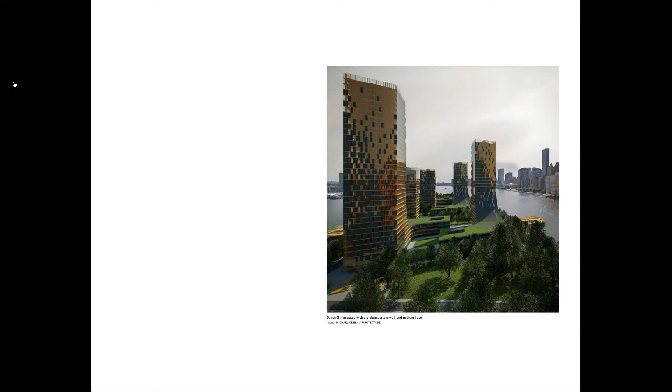So really what happened was, and here I am in the back of the room, talking to a gentleman that I happened to be sitting next to. We were talking about not work, and it turns out that he was a structural engineer. He was from Chicago. He had a child in college at MSOE. And so at the end of Michael Green's talk, I said to this gentleman, is this for real? And he said, it's absolutely for real.

And it turns out it's Bill Baker from Skidmore, Owings & Merrill, who is the engineer of the tallest building in the world. So he got up and presented that 2 hours later. So that really got my attention. And we had been sort of following it ever since. So that was my introduction to mass timber.

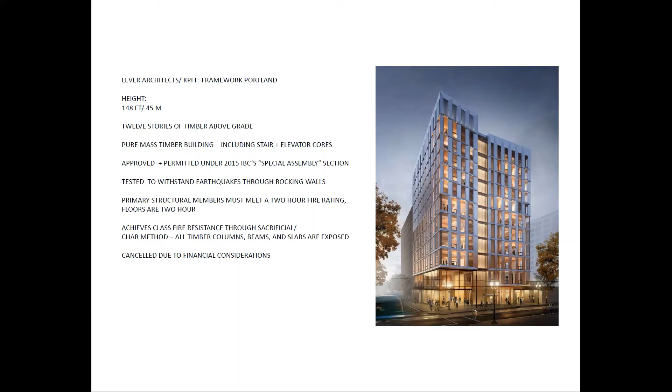So this is the tallest mass timber building that has been permitted in the United States. This is a 12-story high-rise in Portland, Oregon. It's called Framework. So they went through all the testing, which we'll touch on. They got a building permit, and then unfortunately, for financial reasons, the project was canceled. But you can see this was the tallest one in the United States, and its timber was exposed. So this project is critical because this represents how we got our path to approval, because they did it basically through a performance-based testing process, which we'll touch on.

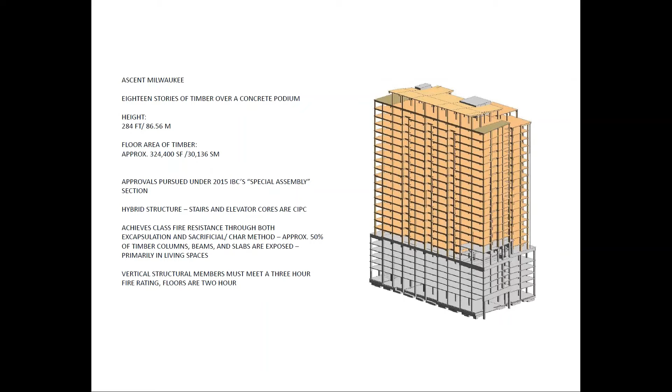So the cost issue is basically the fact that the timber that's exposed has to be really, truly oversized, because basically the timber fireproofs itself. So any of our timber columns or beams that are exposed are oversized by 4.5 inches in every direction. It's called the sacrificial layer. And that's been tested to prove that it can burn for 3 hours and still be structurally stable. And that's the requirement of buildings that are over 180 feet tall, which we are.

So this is just a quick overview of the systems, and it's also a pretty good indicator of how the building will be built. So we have a deep foundation system, we pour our concrete podium, and then we erect the timber on top of that. It's likely that those cores will be all the way up before the first timber arrives.

And so there is no prescriptive code under which this is allowable, but the code that Wisconsin lives under has a performance-based path to approval. Again, following what happened with Framework in Portland, there's alternative means language in the code that basically says if you prove that you can meet the criteria for a building of this height through independent third-party testing, then you can find a path to approval.

So New Land directed us to pursue this as a mass timber building a little over 2 years ago. And our first presentation 60 days later of an early concept was to the DNS, the Department of Neighborhood Services, to their commissioner, who has since been elevated to the secretary of the Wisconsin Department of Natural Resources, because basically if DNS did not even conceptually approve of this, it was dead. We were very fortunate in that the commissioner of DNS at the time has a forestry background.

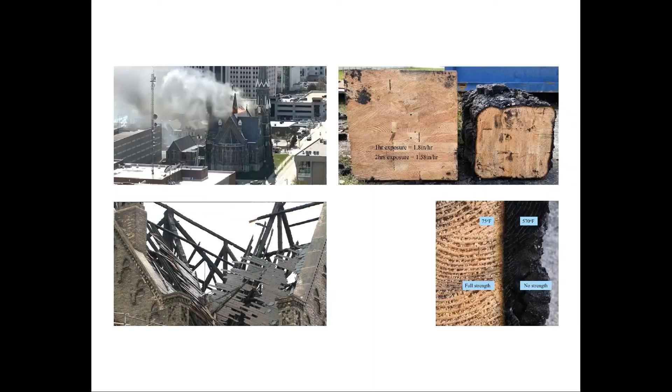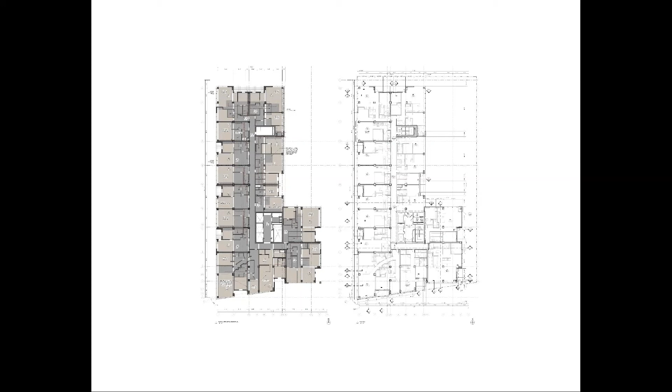This diagram, it's actually more important to see the diagram on the left, and that is a ceiling plan. So anything that's in gray is a drop drywall soffit, again concealing plumbing, mechanical, electrical. And then anything that's in tan is exposed timber. So what you can see is that all of the living rooms and all of the bedrooms, basically anything on the outside wall, is exposed timber. If you think back to that Carbon 12 image that I showed, that's about what we're going for, and so far so good.

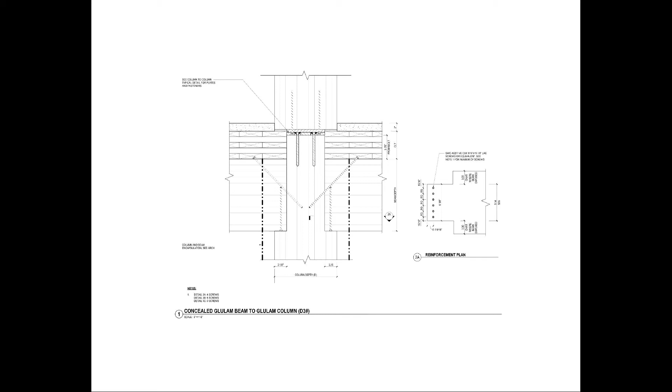Very quickly, there's two kinds of connections, and again, this is driven by cost. This is a simple bearing connection, so wherever a column to beam connection exists that's concealed by drywall and doesn't require that extra 9 inches of char, we can reduce the size of the columns and fireproof it with drywall. And this connection is much simpler than an exposed connection, which is this connection.

This was tested for the Framework project. Again, we owe that project a huge debt because this was the project where the connector has to pass a 2-hour fire test. And Framework did all that testing in conjunction with the University of Oregon and the state of Oregon and passed those tests.

So we're relying on their test data, which was made public, to prove to the city that our connectors can pass a 2-hour test. But this connection is, you can also see the columns much bigger. This connection is far more expensive than the simple bearing connection. Even if you're not in the industry, you can see there's a lot more stuff happening here.

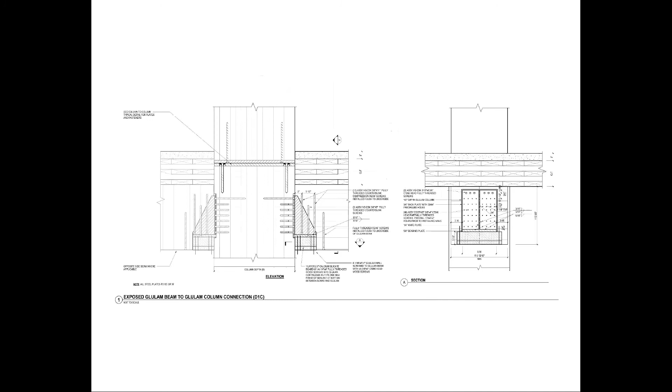So this is, and again, this is one of the slides that I took out, but I just jumped back in. This is just kind of an example of how a timber structural system interacts with a building enclosure. And so you can see, if anyone who's in the industry, it's not that different. There are some, especially in the image on the right, there are some waterproofing and fireproofing details that are a little bit above and beyond, but really the timber slab acts much like a PT slab, or I'm sorry, post-tension concrete slab. And it's a flat plate. It's about 7.5 inches thick with a lightweight concrete topping on it. And again, just some of the waterproofing and fire stopping details are a little bit different.

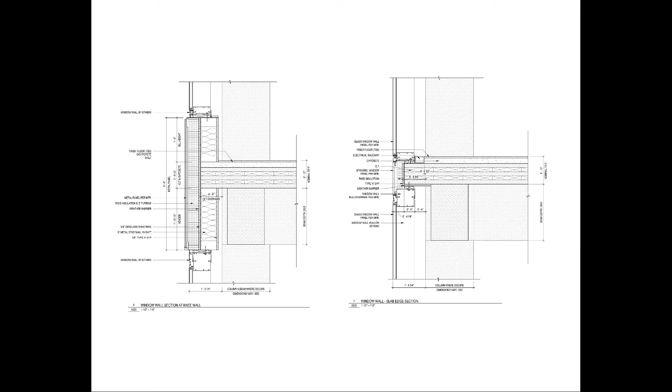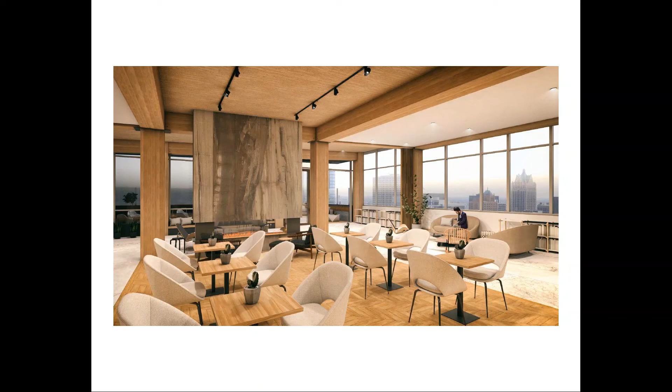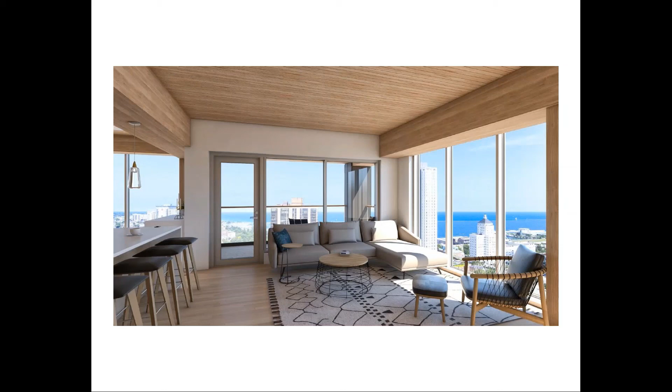Again, this is an early image of our amenity level, so you can sort of see what the views would be like and the level of fit and finish. We're actually finalizing this right now. At the top of the concrete podium, we have a four-season swimming pool that features operable accordion glass walls. So when the weather is nice, it can be opened up and get fresh air. I don't recommend this. It's proving to be kind of a detailing nightmare, but we're doing it anyway. And then again, a view to the east, again, just featuring the timber and living areas.

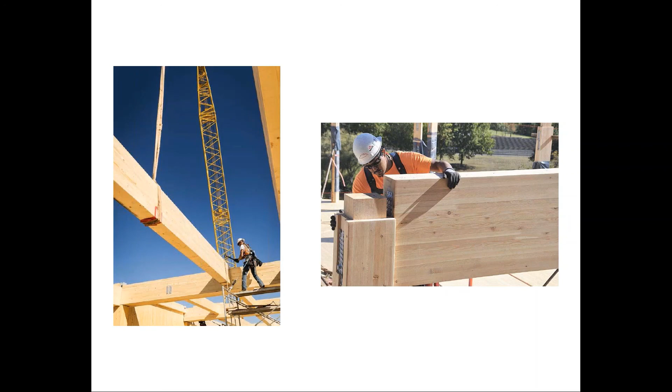A little bit of another reason why mass timber is appealing to developers is it's basically tinker toys. And so this is just some examples of how these members are put together. They're hand set in the field. It goes up incredibly quickly. And you can basically see in the image on the left that they're knocking it into place with a rubber mallet.

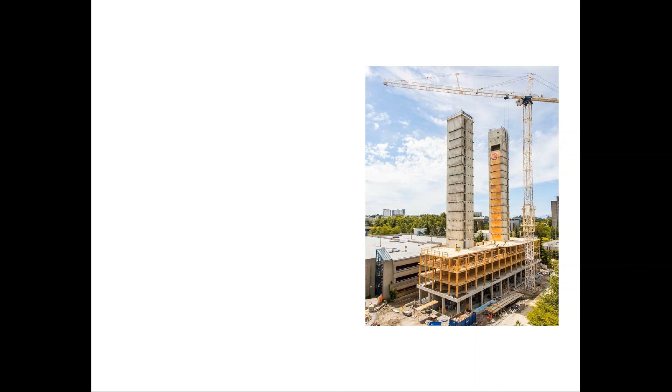This is Brock Commons back in Vancouver. So this is what our building will look like if it's under construction. That is, the cores go all the way up. We worked with Milwaukee Fire Department to ensure that there will be firefighting capacity during construction. The stairs will be in place. There will be standpipes for water in these concrete cores because the building is vulnerable during construction. So we've worked through a plan with Milwaukee Fire Department to make sure that they can fight a fire even during construction.